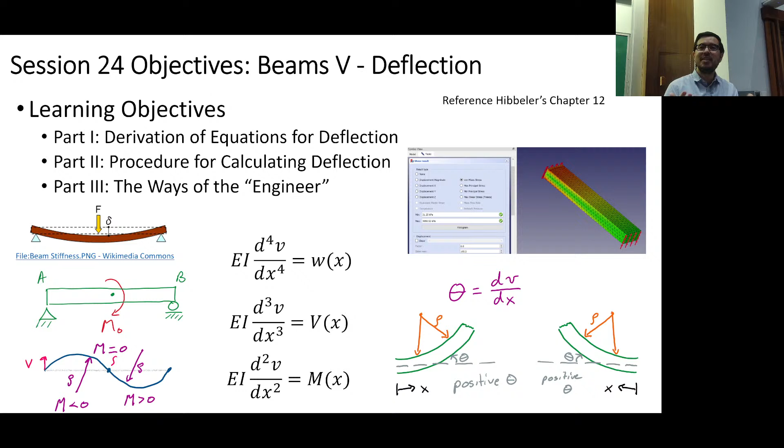So we're going to derive these equations for deflection, and even before we describe the procedure, we'll go ahead and show you how to do it, and then there are some suggestions on the step-by-step technique for doing it. After that, we'll talk about the ways of the engineer, as I like to put it - in other words, the likelihood in 5 years of you doing these calculations, unless you're doing a graduate degree or having a good time on a Saturday night, is low.

What you'll see is that there are tables out there on the internet to help us calculate the deflections across a beam, and there's finite element analysis again - one more opportunity to do finite element analysis. We're not going to use PrePoMax for this example, we'll just use the CalculiX solver in FreeCAD. Yes, I want you to use FreeCAD because that's what everybody has access to, so please go ahead and download it in the EIT cluster now. Okay, so here we go.

This slide is a review of the sign conventions for our diagrams that we draw when we are performing equilibrium calculations using the method of sections on beams. As a recollection, we have this, and I just want to make sure you can see what I can see.

In this case, you've got this distributed force across it, and we would say that if it's going in the y direction, which is typically what we use for the vertical direction, upward, then it's positive. Often this quantity is negative because you have loads coming downward with gravity, either because you're setting a mass on it, or just from the mass and distributed force of the weight of the beam itself. But that is the convention. And we know that this quantity has units of newtons per meter.

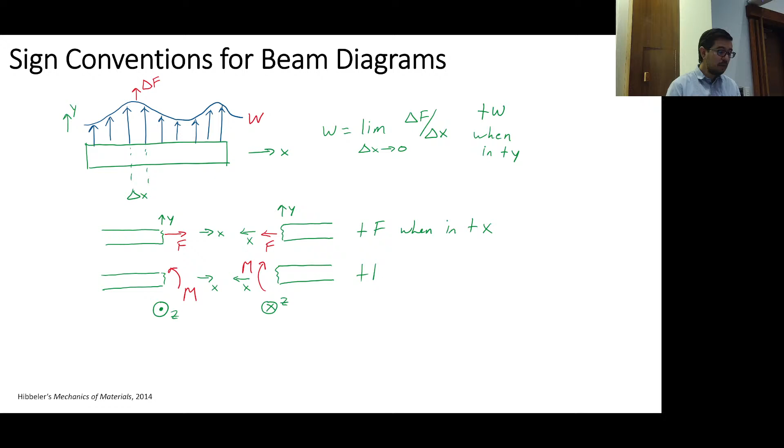The one that always trips me up, I don't know the appropriate way to remember it, but for M I just think about smiley faces. I'm not the most smiley person, but that's the convention I remember. But V, because of my issues with the book I use, which is different from Hibbeler's book, throws me for a loop every time. So V going down if you've covered up the right side, and V going up if you covered the left side. Again, this is just the same thing, with a note that I'm confused because Crandall, Dahl, and Lardner use a different convention. So this is review.

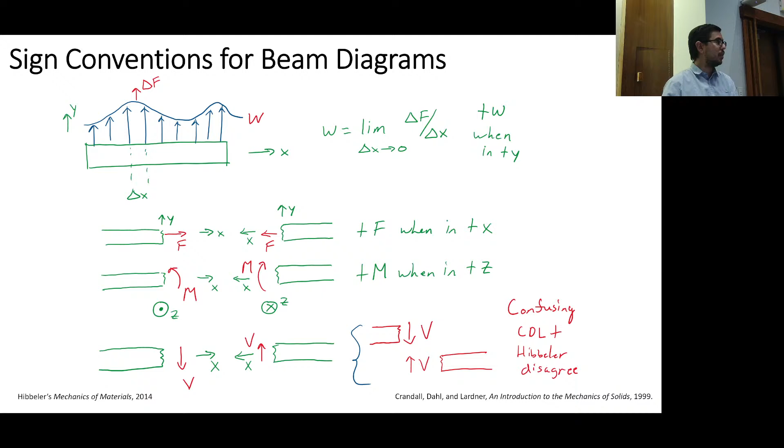Why are we reviewing it? Because we're going to be using this stuff again. This is our fifth session on beams.

So now, do we know? We've said this before - we know with bars how to calculate stress, strain, extension. Shafts, we know how to calculate stress, strain, shear strain, shear stress, and also the angle of rotation, the angular displacement, across it. Trusses, we haven't really talked about displacement too much with trusses, thank goodness.

It's definitely doable. What you have to think about is the extension of each of those members, and then compile it, and you can figure out what the displacement will be at a point on the truss. We haven't really talked about displacement with pressure vessels - not super relevant. We're more concerned about whether or not that pressure vessel is going to be able to handle the loads that it has.

And so now it's time for us to discuss deflection on beams. And we ask ourselves, why do we care about deflection? Well, we might need to meet certain functional requirements. Usually the first one is, will it fail due to yielding?

So I would say usually our priority is first to make sure we've met our requirement for the yield strength of the material, whether that's through maximum shear stress, maximum normal stress, Mohr criterion, or von Mises criterion. But that's the first thing to do. The next level is, I don't necessarily want this much deflection, or I'm designing it so it doesn't sag too much. And another issue that can happen with deflection and bending stress is that you could end up having cracks that propagate and lead to fracture.

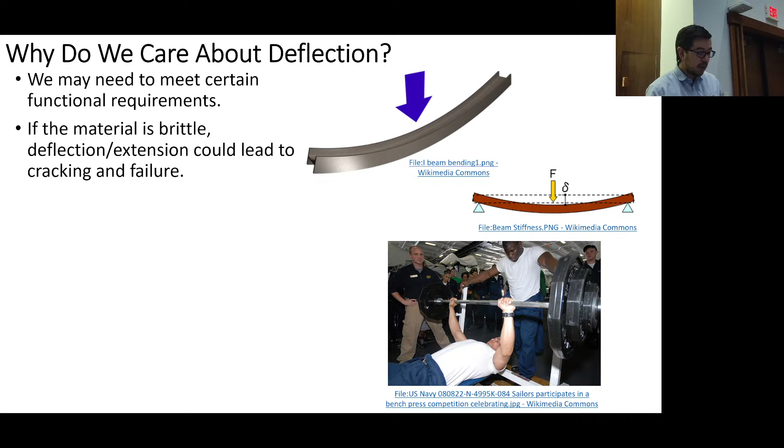Could we go between deflection and stress? In other words, if I have a structure and I'm able to measure its deflection, maybe it would be nice—like if that branch of a tree is sagging quite a bit and I pull on it, I can break it. We have this intuitive idea. We can back calculate, just like using strain gauges to calculate strain and then look at what the stress is in the system. We could do the same with looking at deflections of a beam, and then figure out what the internal stresses might be.

Wouldn't we like to be able to calculate the spring constant? At the beginning of the class we talked about bars as springs, and shafts as springs. We've been able to assign a spring constant, or spring rate, to these different structures to shortcut the calculations—without doing PL over EA every time, just saying the force equals K delta, and K equals EA over L, so I can quickly calculate the extension. So that might be one reason to understand the deflection and spring constant.

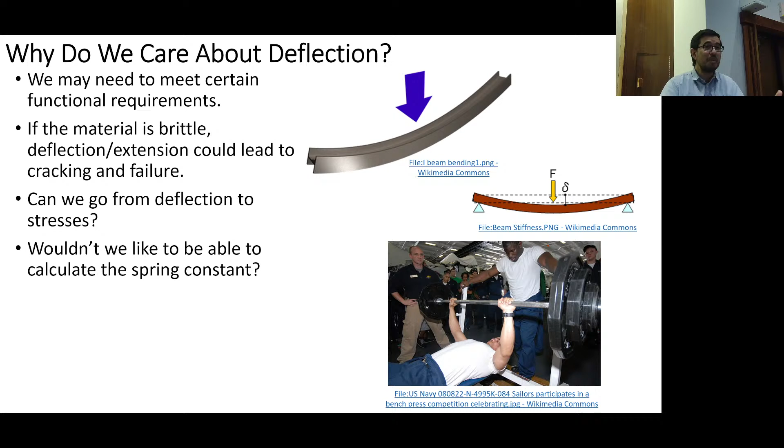And make sure that the input, with the air going over, the vibrating motors, everything else, is not going to excite that resonant mode, so that your wings don't experience too much amplitude of vibration and they stay on. Super simplified example, but nonetheless relevant to beams and their deflection. All right, was that a stretch? Maybe. But a lot of the things in this class have been building on each other.

And then another kind of thing: maybe you get into acoustics and you want to design tuning forks. I hope some of you go off into diverse fields, I hope all of us get a chance to do diverse things. But there, you've got the fundamentals after today. Get it? Fundamental frequency? Anyway. Any musicians? No, okay.

So you've got the idea that if I can figure out the deflection and I can figure out what the spring constant might be, then I could also think about what kind of sound this makes when I vibrate it.

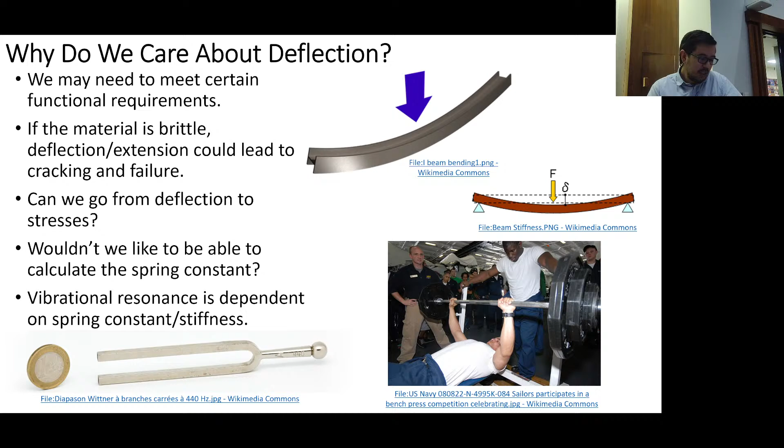And I guess here, this is just a picture. Obviously you don't want these bars to bend, or you don't want it to fail. But you also don't really want it to bend, and you don't want it to plastically deform even more than that. I mean, it's going to bend, right? There's nothing you can do. The thing is going to bend by some amount, but we don't want it to bend, we want to be within some limits.

Okay, this is not the Olympics, but it kind of looks like one of those balance beams, doesn't it? All right, but what is it really? It's a pin on this end, and it's a roller on this end, so we could say that this is simply supported.

Then we want to talk about what's happening on these ends. On the ends, there's going to be no constraint on displacement, no constraint on rotation, and there's no restraining force. The curvature can be zero at the end -- we'll get into curvature in a little bit. But that's what you have at the ends, so that would be here and here.

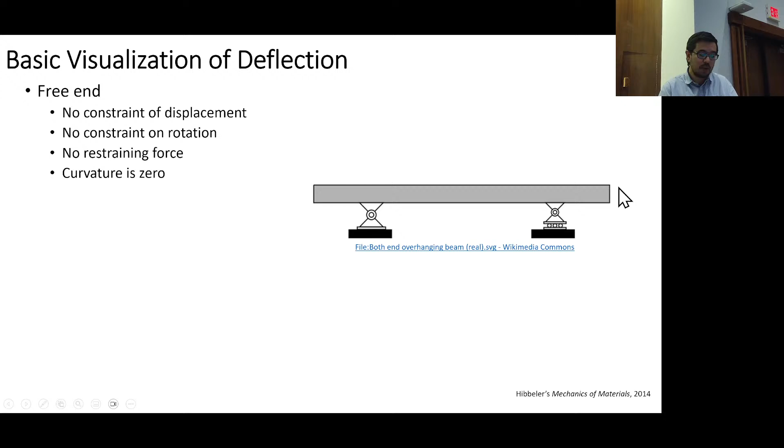If you have pin constraints at the ends, this is now essentially just like this, but we cut the beam, and they don't have any free ends. So here you can say that the displacement is constrained on either end, there's no constraint on rotation, and there's a restraining force. You see that? Those are the boundary conditions.

Why are we talking about boundary conditions then? Well, remember we had to use boundary conditions when we were solving for the internal shear force and the internal bending moments. We're now going to have to use some boundary conditions to solve for the displacement of the beam. If I just put a beam in space and drop it, that's not really a statics problem, but I need to know where it's being constrained in terms of the forces acting on it, where it's constrained in terms of displacements, and where it's also constrained in terms of angular displacements.

We're going to talk about that, and we'll also look at symmetries and internal boundary conditions, internal symmetries that we can leverage as well. A fixed wall will have a constraint on displacement, so there's not a wall -- this is the free end, right?

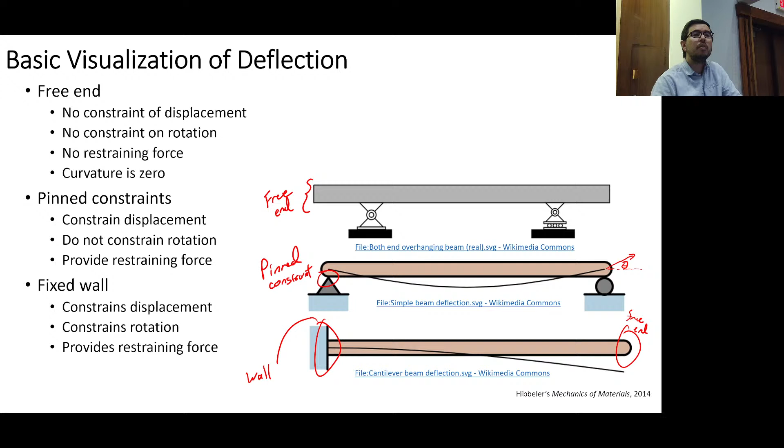What you can see here is, even on this end, there is an angle here, at least with the vertical, with the horizontal. And you see how there's also some displacement. That went down, right? So we usually use v to describe the displacement, and in this case, the v would be negative.

And we use theta to describe this angle. This angle, theta, we describe as being the derivative of the vertical displacement with respect to x. Can you see that? That's no more than saying that's the rise over the run, right? So that's some delta little v, and this is some delta x.

So that's how we're going to describe slope, in terms of theta and in terms of dv/dx. This is going to be kind of like our curvature. I don't expect you to remember all this, but when we discussed our derivations for the flexure formula for beams, we said that if the center of a circle that is carving out the curvature, or the radius of curvature...

When rho would be the radius of curvature, if it's above the beam, we said the curvature was positive. And if the center of that circle was below the beam, we said it would be negative. But here we can almost see that there's going to be some curvature in here. And this curvature, which would be kind of like this 1 over rho, that is going to be, so we'll call that curvature.

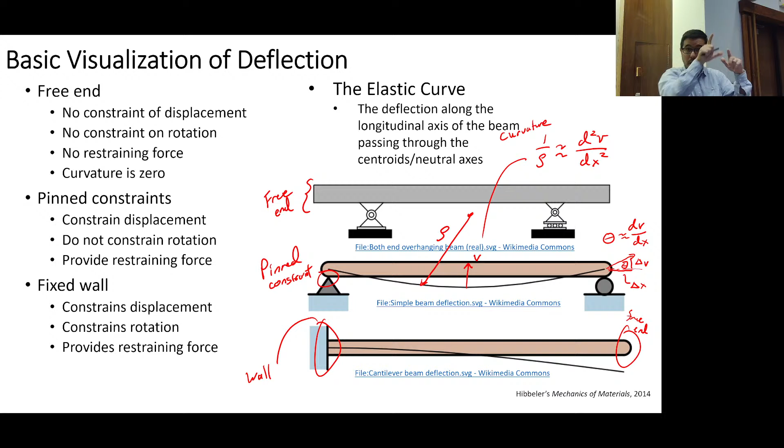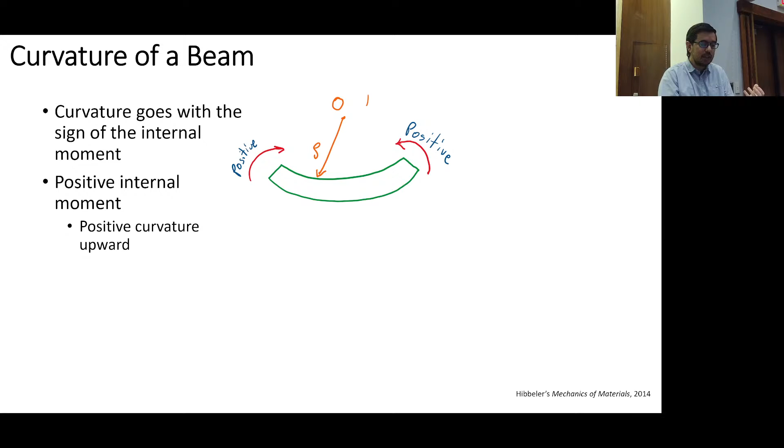Anyway, so we can say something interesting. This is the smiley face we talked about, and that smiley face is associated with a positive moment. So when the center O is above the beam, we have m greater than 0. So now we're starting to correlate the deformation, the geometry, and the internal bending moment.

And whenever you start making relationships between forces or stresses and moments with deformation, that goes back to our third pillar of constitutive relationships, constitutive equations. So we're going to work toward figuring out how to couple the material properties with the internal loads and external loads, to be able to figure out how things are deformed.

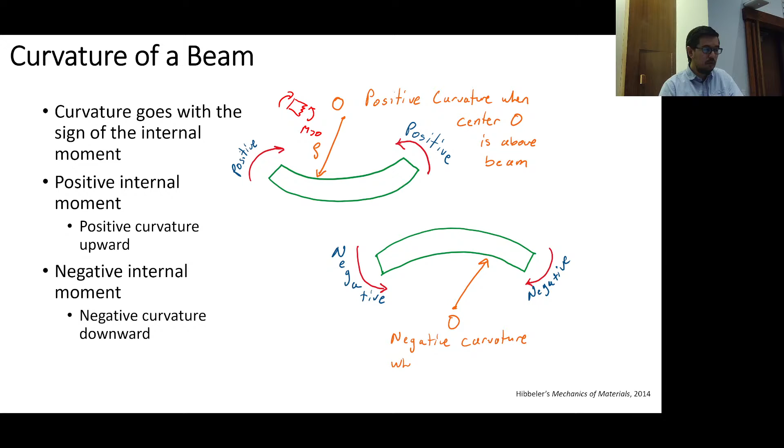So once again, if O is above, that's positive. If it's below, it's negative, and that's what you see here. In this case, the O is below, and we're good. Now let's just think qualitatively about what's happening with the curvature of a beam. Qualitatively meaning at least I want to know is M positive or negative in particular areas.

And also think a little bit about the shear force. Okay, so this would be the shear force diagram across this beam using the conventions that we've had in the class.

So remember, what is this magnitude of the jump? If I want to know, going from this point to this point, what is that magnitude? Yes, P. It's P, right?

And we're going, P is coming down, right? And as we're going left to right, and this is going to become even more important today, we have to know if we're going left to right or right to left. So that's that drop there, and then this is what the internal bending moment diagram would look like.

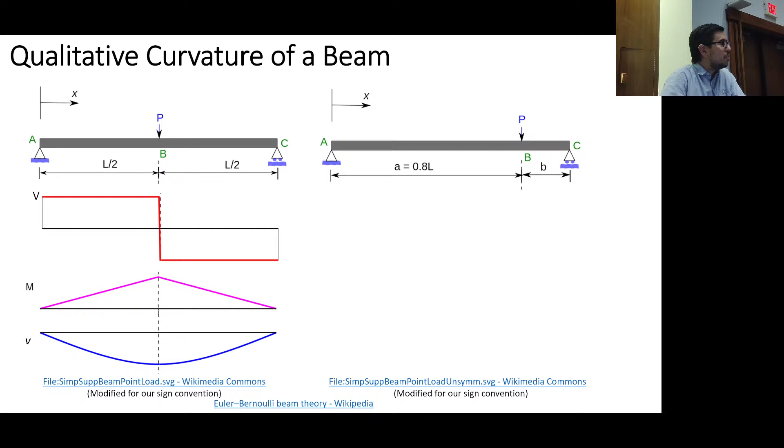The displacement, we can intuitively say, if anyone ever stepped on anything supported with some type of flooring and beams on either side, this is what you would expect. Or if you step on a 2x4 supported on either end by a block, you're going to expect this type of deformation.

And what's cool is this is intuitive, but in the class we've kind of been developing this intuition as well, right? What's happening with the forces and the moments inside. So once again, yes, we have positive curvature.

And this problem is very similar, right? In that we have a shear force internally as we're going across, and the bending moment is also very similar, but it peaks at this location of P, and we have also a positive curvature.

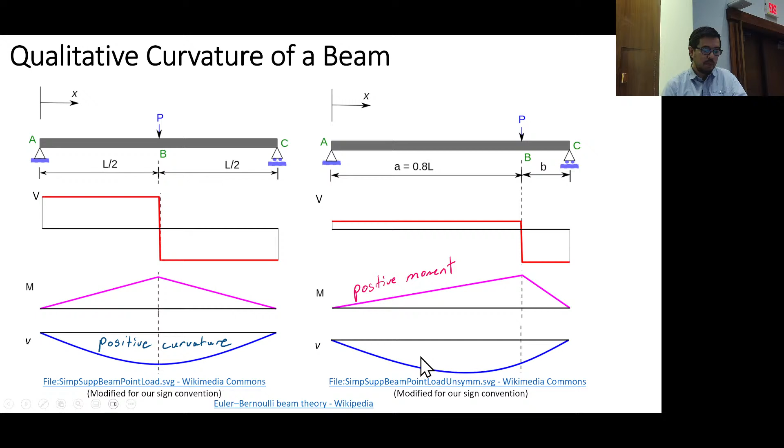Any questions on what we're doing here qualitatively? No numbers, just thinking about how does the deformation go, or how does the elastic curve go, with what we've kind of been describing previously.

So what we would like is a relationship between the radius of curvature and the bending moment. And we've kind of done this already, okay?

The shear force, I've said this also before, does contribute some to the deflection, but typically it's not a big deal. Remember, we've done this example with the pure shear and the double shear, where we asked how short do you have to make the beam such that the shear stress gets close to, or half of, the bending stress? In fact, I said specifically half of the bending stress.

And why did I say half of the bending stress? Well, now we know. If we're caring about the maximum shear stress theory for failure, we need to understand that a bending stress, or a normal stress, is going to be twice the shear stress that we get under uniaxial loading.

This is more Mohr's circle, uniaxial loading. What's the equivalent shear stress? A 45-degree material element, and the shear stress is just the radius of that Mohr's circle, and that was sigma 1 divided by 2. Okay, we've done this a number of times now.

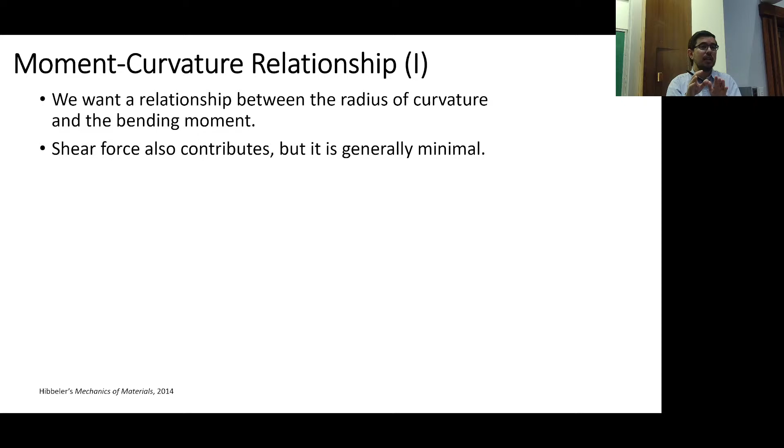So we don't care too much about the shear force, but we do care about the bending moment, and we are going to describe a distance along the longitudinal axis, and we're going to describe the bending moment as M, and we'll say there's a V, which is a positive upward displacement, okay.

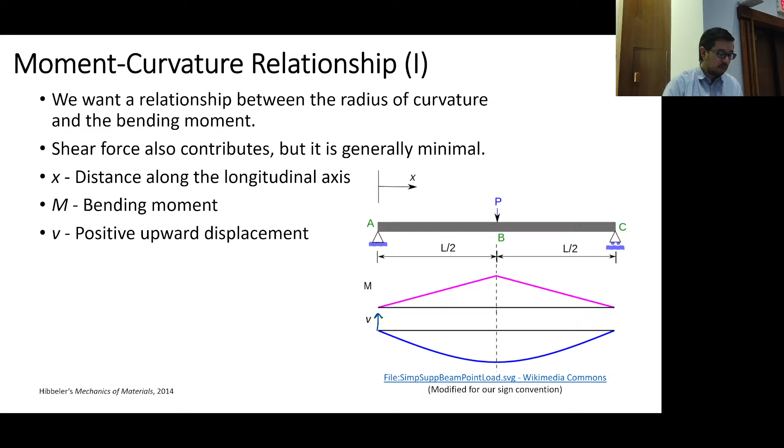And we'll go from there. So this is kind of familiar in terms of this radius of curvature. We talked about the strain and the radius before, okay?

When we did the derivations, but we kind of tossed it out. We said you don't really need to think too much about that minus y over rho stuff. Well, it's coming back.

And the deformed element will look something like the keystone of an arch base bridge, an arch, but upside down, here. So now we say this element has undergone some deformation. If A and B are closer to each other, D and E are farther apart, and the angle we've carved out is delta theta. We're going to have a rho that goes to the longitudinal axis, and some distance above the longitudinal axis that we'll call y, and that's going to affect the local curvature and local radius at any of those locations. And of course the longitudinal axis is going to be unchanged, not deformed.

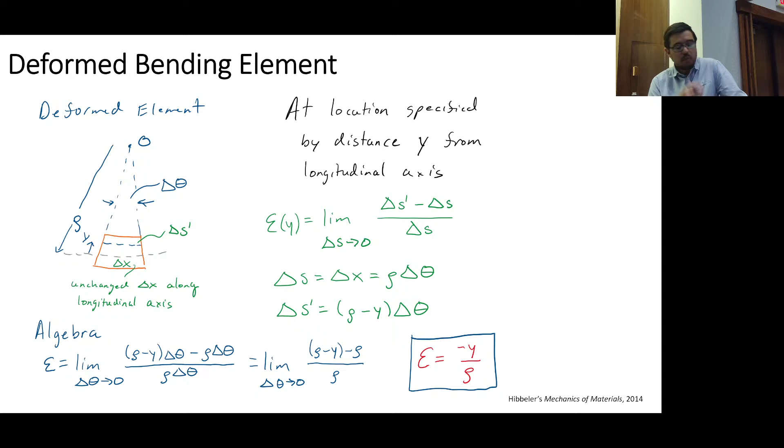So what do we do with this? We have this deformation epsilon - and this is not deformation, this is strain. And what we're saying is that this is the change in, say, a length above the neutral or longitudinal axis divided by its original length.

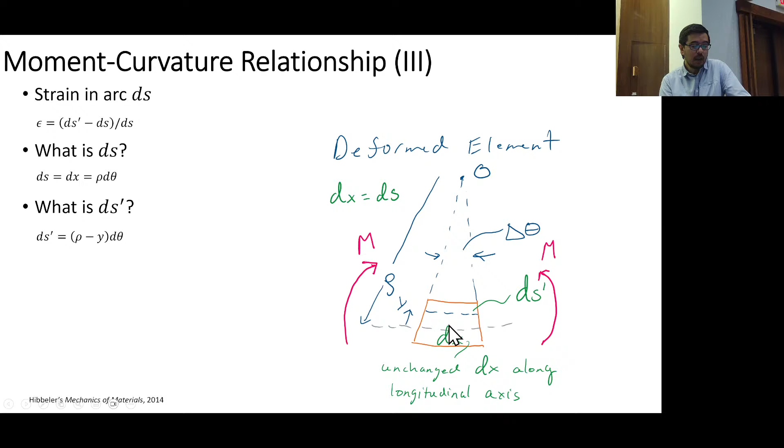And what is ds? Well ds we can say is going to be equal to dx, and dx is the original length of the element we've selected, the arc length of the longitudinal axis over the width of that element. So we can say that is rho times d theta, whatever angle we've carved out at that point. And what is ds prime? Well ds prime is this rho minus the little distance above the neutral or longitudinal axis, times that arc that is cut out - that would be the arc length here. That's what ds prime is. Any questions on this? No?

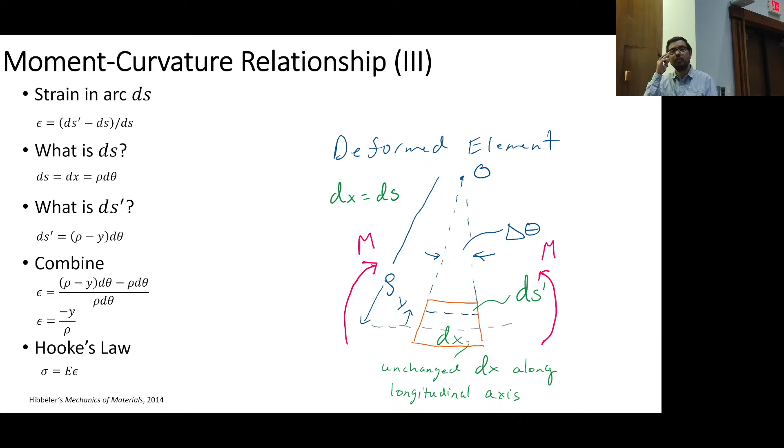Okay so now we've combined these things and we got epsilon is equal to minus y over rho. That's fine. Hooke's law - it's been a while, right? For loading in one direction. So we have sigma equals E epsilon, elastic modulus. There's an important constitutive relationship, that's Hooke's law.

The flexure formula: sigma equals negative my over I. Right, you see where this is going? There's a sigma, and there's a moment that we know is positive. We can combine them and we get this: 1 over rho equals M over EI. Curvature is 1 over rho, flexural rigidity is sometimes what we call EI. So you see this equation.

If I increase M, then 1 over rho increases - make sense? And you already saw that: M positive and more positive, then curvature goes up. 1 over rho is the curvature. Or rho goes down - the radius gets smaller.

This EI is called flexural rigidity. If I increase the thickness of the beam, and it's rectangular, that means I've increased my H, right? And that was the I for rectangular cross section - remember that was BH cubed over 12. That's the integral of y squared dA.

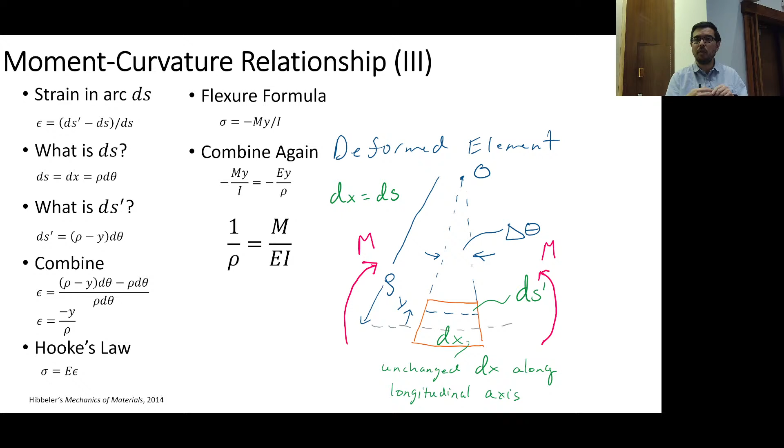And kind of foreshadowing, let's just go back big time. You're like, what is he doing? Well, I'm being annoying.

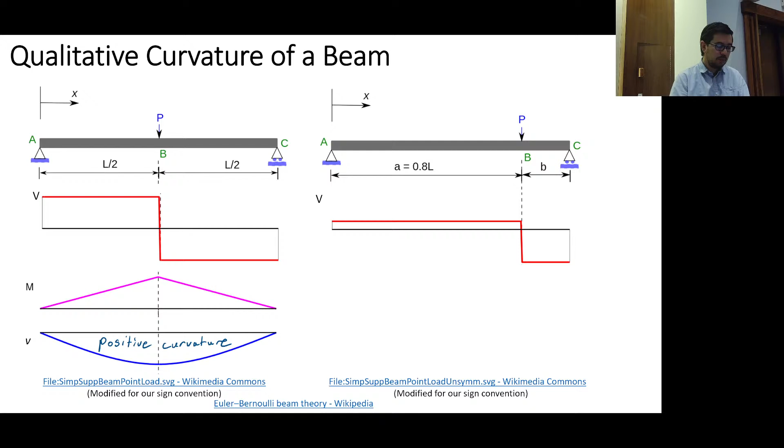Remember this? Even back here we scribbled in, hey wait a second, 1 over rho is somehow proportional to the second derivative of displacement with respect to x. And then we have this dv dx term, and we have v.

Well, if now I've got a relationship that says m over ei is equal to this term right here, and my goal is to get the displacement, what do I do? I've got this now, it's m over ei. This, let's say, is equal to m over ei. How do I go from this? If I've got the left side here, how do I figure out what v is?

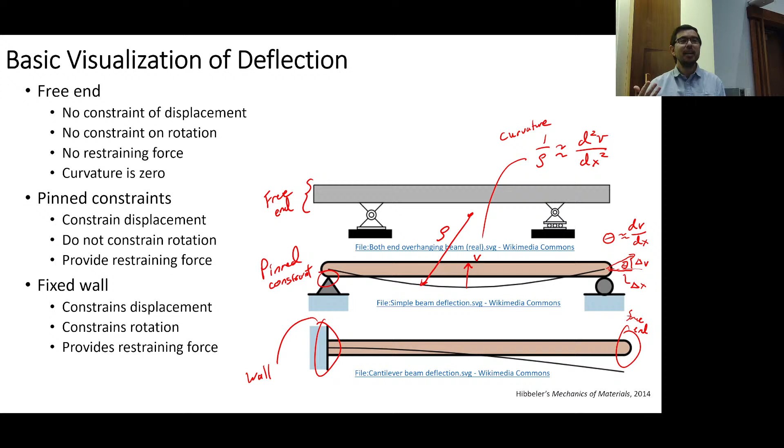I heard it, who's mumbling that? You said integrate twice, right? That's what you do, okay?

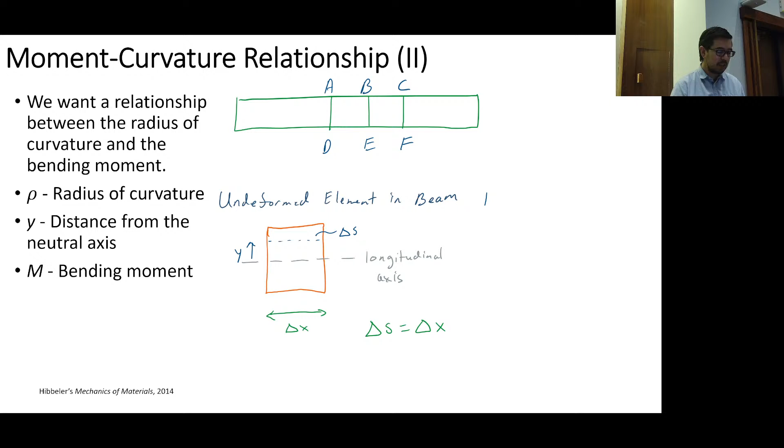All right, so that's what we're going to do. That was worth looking through, flashing back through all these, through, I don't know, what is it, 20 minutes. Okay, so we are going to do that. We have a relationship between curvature and stress.

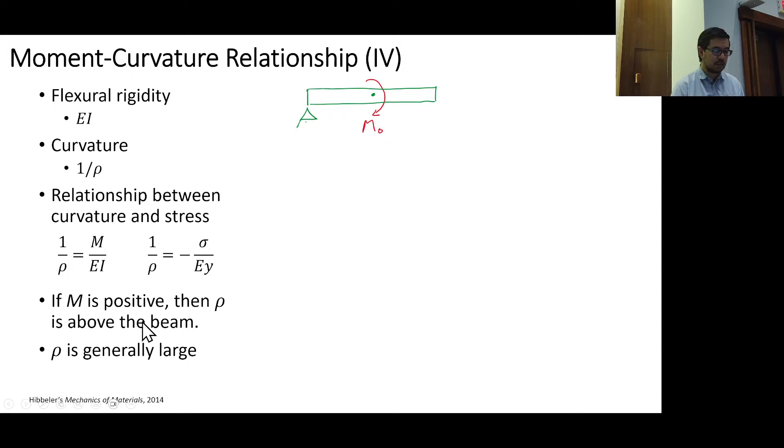Great, okay, if m is positive, then rho is above. Rho is generally large, yes, yes, yes, these things are true. And we can use them to think about how things deflect. Okay, that's great, come on, I just want to get to the deflection. Here we go.

In your calculus class, you probably had this relationship. We're going to greatly simplify this. Okay, but this is the definition of curvature.

We're going to say that now our 1 over rho is equal to m over ei. We can put that in on the left side. And we've got a small dv dx, usually. You see where this is going? Well, if I have a small thing, and it's down here, and then I square it, it becomes even smaller. That's nice and convenient.

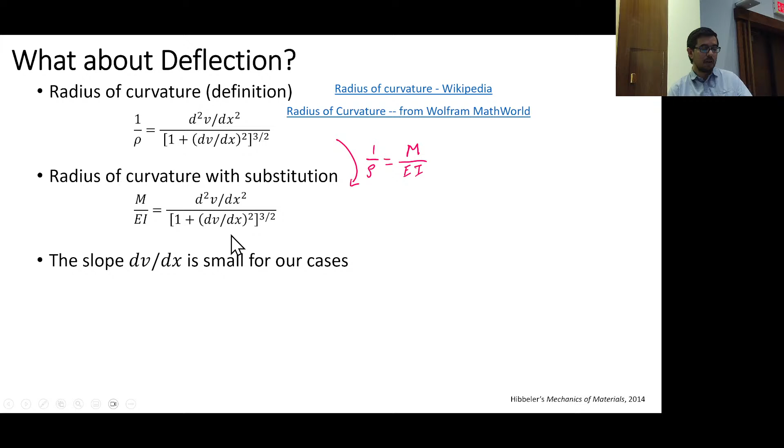Because if I say this is now very, very small, then that means I just have 1 plus a very, very small thing, and that becomes kind of 1 in the denominator, and so I get exactly what we just wrote on the slide 20 minutes ago. That the 1 over rho was going to be somehow related to the second derivative of the displacement with respect to x.

So I can rearrange and I can say m is equal to ei times the second derivative of v with respect to x. Now, does this look like something that we know how to solve for? Yes, we absolutely know how to solve for m at this point in this class. Okay, we better, this is the internal moment.

But do you remember that there were those other equations? There was that w equals dv dx, okay, and that dm dx is equal to v. Do you remember these equations too? And remember how we said, hey, sometimes you want to think about just starting from a distributed force across the beam, right? And then once we've done that, we can figure out what the v is, and then we can integrate the v to figure out what the m is.

And now we're saying that if we know what the m is, we can integrate it once to get the slope of the deformation, and if we integrate it again, we can get the deformation, v. How many integrals is that? If I want to go all the way from a distributed force now to v, how many integrals do I get to use?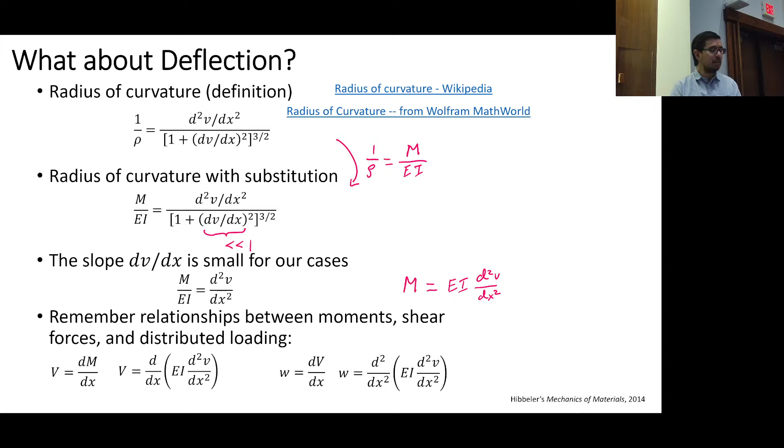And if e and I are constant, which they often are for our problems, constant cross section, constant material, and material elastic modulus, then we can write these. And these you definitely want to have on your sheet of notes. They're not that earth-shattering, okay?

And there are some steps that may be wise to bypass. For example, if you're given a problem where you already know m, and you're asked to figure out the elastic curve, which means you want a relationship, you want to come up with an expression for the lowercase v, don't do four integrals, right? You only need to do 2 integrals. Because you just have to integrate m twice, and multiply by 1 over ei to get v, lowercase v.

If you have to start all the way back with a distributed force, then yeah, you could do these integrals. Often though, we know how to figure out m. We're pretty good at figuring that out, at least for determinate systems. On Tuesday we'll talk about indeterminate systems, but for determinate systems, even though we have these fun-looking equations that let us do 4 integrals, often it's a good idea to do 2 integrals to figure out m, and once you figure out m, then do 2 more integrals to figure out v.

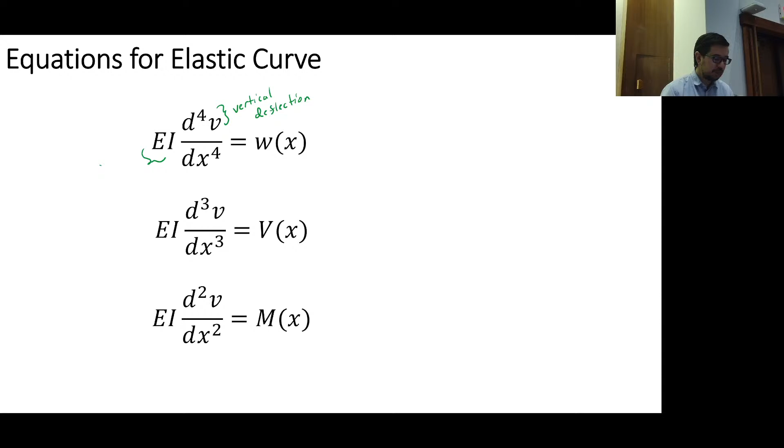Okay, so we've got all that description. All right, so here we're not even going to draw - look, there's no drawing in here. This is just a chance to do the math, there's not a diagram. Now you can think of what the diagram should look like though. Just look at the problem for a second and tell me what you think this beam is experiencing and what are its constraints.

So there's the math, and we're going to figure out deformation without doing any free body diagrams yet, nothing like that. But what is this external loading describing? What are the boundary conditions describing? And how would you draw this beam from the math?

Yes? Distributed load. Okay, so distributed load, right, because it's minus W naught, so remember distributed load across the beam, and it's across the entire beam, because w(x) is equal to minus w naught. Good. Now, okay, so that tells me something.

What about the beam? What are the constraints? How's this beam externally being supported? Yes, can you put your fingers up like that again in the green shirt? Yeah, all right, that's it. It's got essentially a pin on one side and a roller, we could say, but really it's like a pin-pin configuration. So that is a simply supported beam, and we can go ahead and start messing around with this.

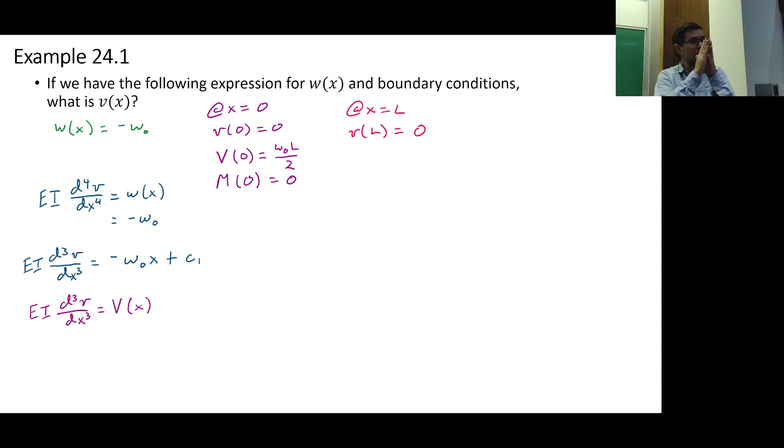Okay, and if we had done the free body diagram and the external loading, and then took a little bit of slice, remember how we did these things where even when we use the integral differential relationships, we would have to do external loading first, and then go just a little bit to the right of the left side, and a little bit to the left of the right side to figure out what the internal shear force was. But that's already been given to us, and that's what that value is.

So we can say, all right, that's the boundary condition, and then we can pop it in. So C1 is just going to be that.

What's next? Well, now we have this integral, and we've introduced another constant, C2. We took the integral of this expression right here. We already know what C1 is, but it's just kind of dangling here. And we've now got EI second derivative of v with respect to x.

And what do we know? We know that this expression, EI second derivative of v with respect to x, is equal to the moment, m. And once again, we can plug in our boundary condition. We know that m at x equals 0 is equal to 0. So what does that mean C2 will be? 0, right? It has to be. So we plug that in, and we get that C2 is just equal to 0.

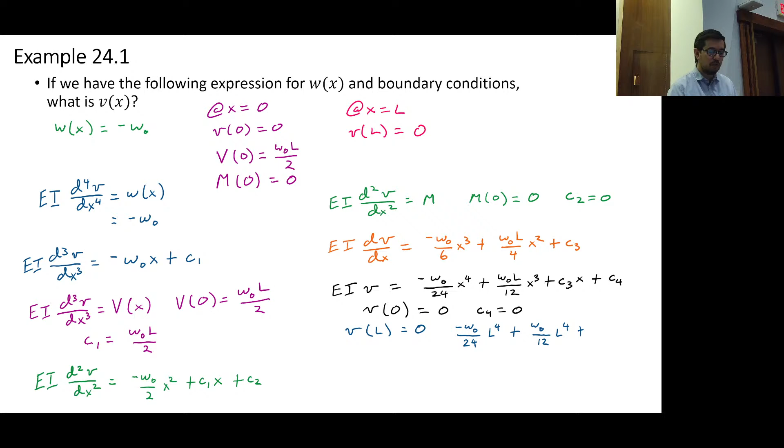All right, this one's a little more complicated. I had to plug in v of L, and I got to get 0 there, right? So I had to plug in L here, L there. And when I do that, we can solve for C3. So C3 is this quantity there.

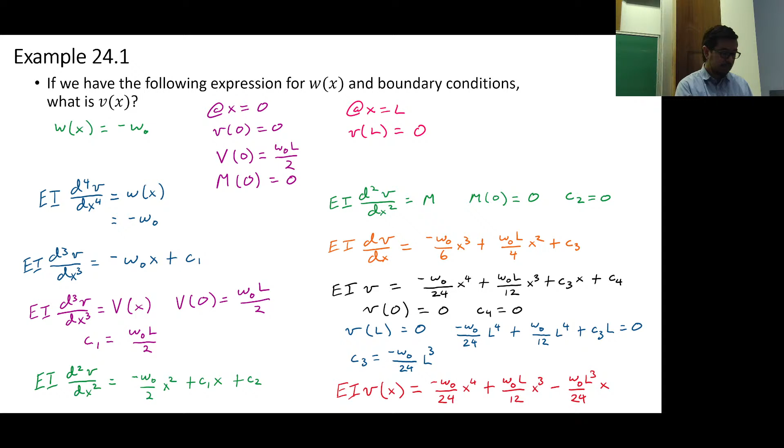And the result is an elastic curve described by this equation. And often what you'll see is we put 1 over EI in front of it. Okay, so we can say it looks like something like that. And we have this type of system, okay?

And we've now got our expression, okay? And we could even figure out where the v is a minimum, and we can do that where x is equal to L over 2, and we can figure out that value.

Any questions? This one, any questions on this? Any thoughts, concerns? Okay. Some of them are moving kind of quickly, but you have a chance to run through this a little bit in more detail.

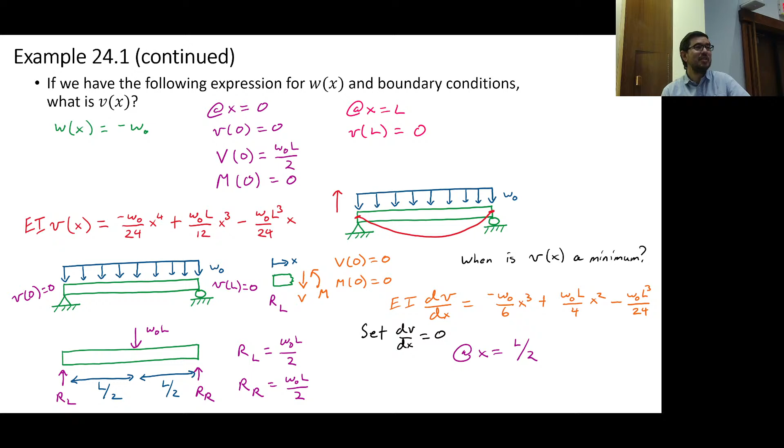So if you like integrating polynomials and plugging in boundary conditions, this is the time. This is the moment. The moment, not the shear force. Well, it could be the shear force too. All right, so you have a question there that you get to work on.

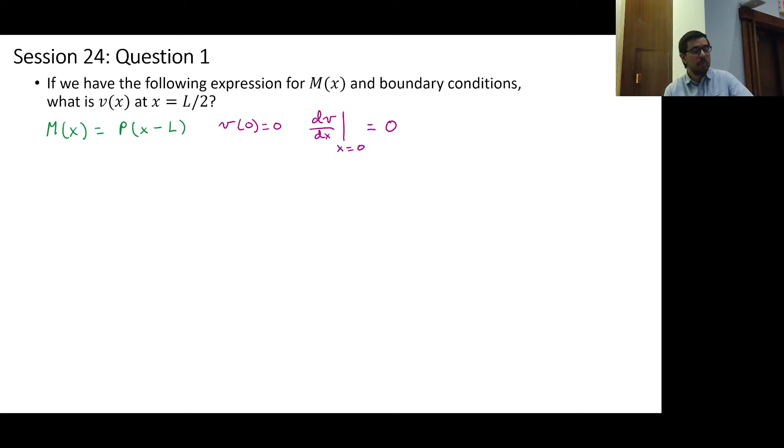In this case, you're going to have the m of x given. So that's kind of nice, right? Because now you only have to do 2 integrals to get to the little v.

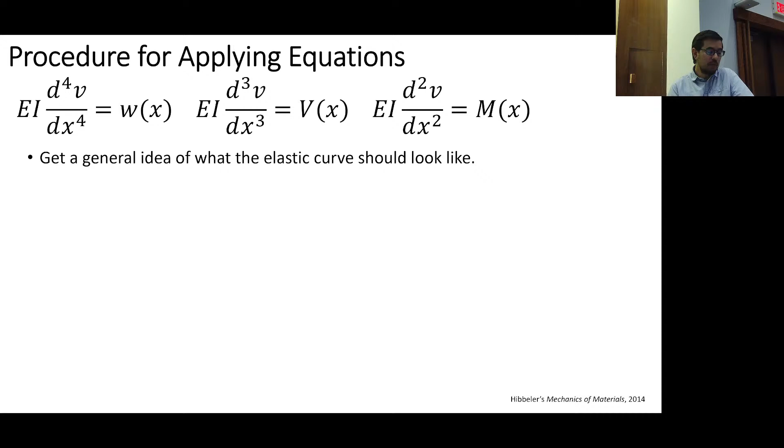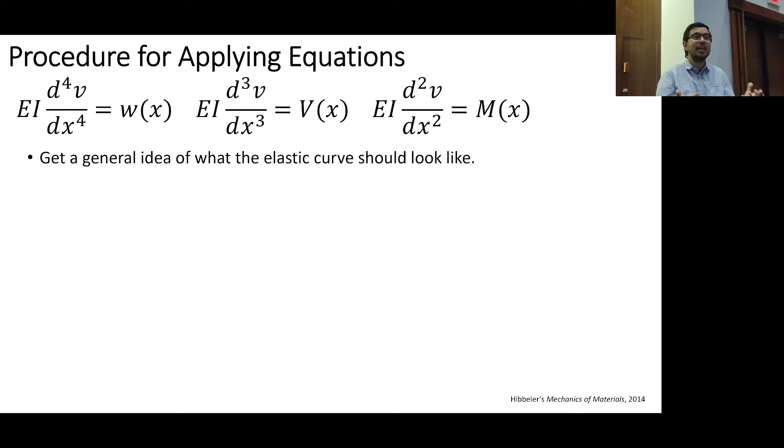We're going to talk about a procedure for solving for the lowercase v using these equations. First, think about it, okay? Try to get a general idea about what the deformation looks like. I don't know if people are going to take pencils to this next exam and start putting their fingers and doing distributed loads across it and then say, oh, hey, look, that's what it looks like, right? But that's the idea. So you want to get an idea of what the elastic curve will look like.

This step can be confusing, and we haven't discussed it yet. We will now, though.

Just like we would introduce these delta V's and delta M's when you had a concentrated force applied, or a couple moment applied to the beam as you're going across, we'd say, ooh, I can do everything up to that point, and then I've got to change it up. And then you go on. Or sometimes you go from the other side, so you could do things, but at that point where there's another load being added externally, or another boundary condition, you could even have an overhang—that was scary. It's still a little bit scary here.

So we're going to talk about how we break up the beam. It's like a relationship. You got this nice little beam, you got two towers on either side, they like each other with the beam in between, and then something comes in between them, and now you got a discontinuity, okay? It's like having kids. That's what happens.

Now we've got to find the necessary expressions for moment, shear, and/or distributed loading. We're going to integrate twice for moments, three times for shear, or four times for distributed loading, and we have to keep adding constants. So you already saw this, right? These are indefinite integrals. We have to keep putting constants in and keep solving for them.

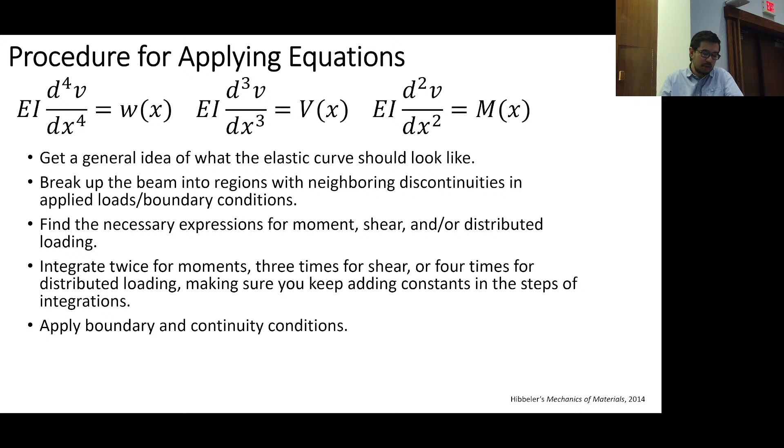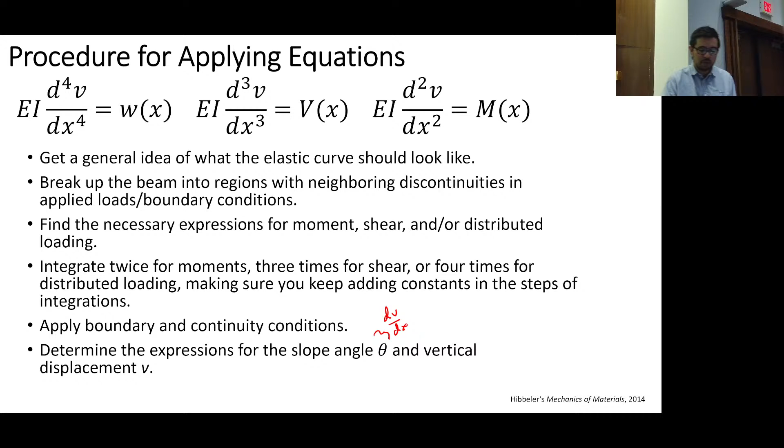To solve for those constants, we're going to apply appropriate boundary and continuity conditions. We'll get into continuity, what that means, because right now we're just looking at boundary conditions. But there are also some interesting things that happen when you are coming from far apart and you meet—that's a continuity condition. Then we'll determine the expressions for the slope angle theta, which is dv/dx, and the vertical displacement little v.

So now let's talk about breaking beams. This is hard. Breakups are hard, right? In life as well.

Here, if you just have the P at the end, everything's pretty happy, nothing too serious. But once you add this extra P, that adds nervousness to me, or maybe a little bit of anxiety. In fact, on the last exam, initially I wrote it just with a nice distributed load across it, and then I said, well, what if we just make it so the distributed load goes halfway across the beam? I started working it out—I was like, you all could do this, but in the limited time that you have, probably a bad idea. So it's just better to keep it with a distributed load across the top.

And we see now we have this jump in the P, in the negative P, like that, and you can see that this is what you would get. This is flat, so these are actually supposed to be lines with slope—they're not curves, they're lines with a point. All right, that's as bad as my drawing might be.

Here are some options. One option: I'm going to describe two parameters, x1 and x2, and they both are with respect to the wall. Another option: I want to describe what's happening in between the wall and the first P, and what's happening between the two P's, so I'll describe what's happening with x1 up to the first P, and then define another parameter, x2, from the first P, moving to the right. A third option would be: I'm going to describe an x1 coming from the left and an x2 coming from the right.

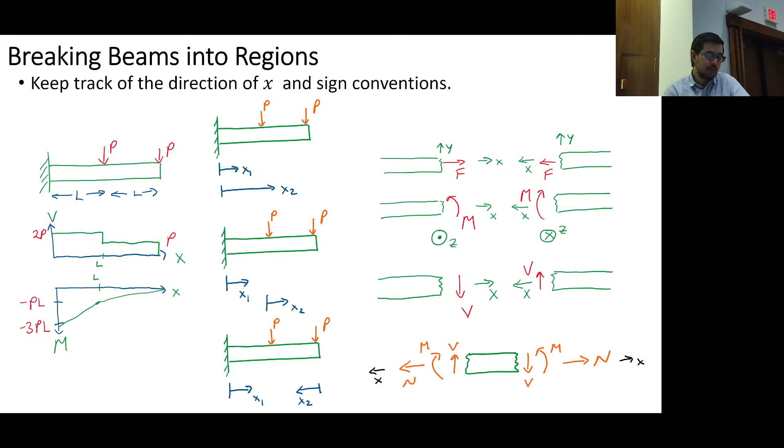Now, when we break the beam into regions, we've got to keep track of the sign conventions. That's a given. We also need to keep track of slopes, and you can begin to see this behavior.

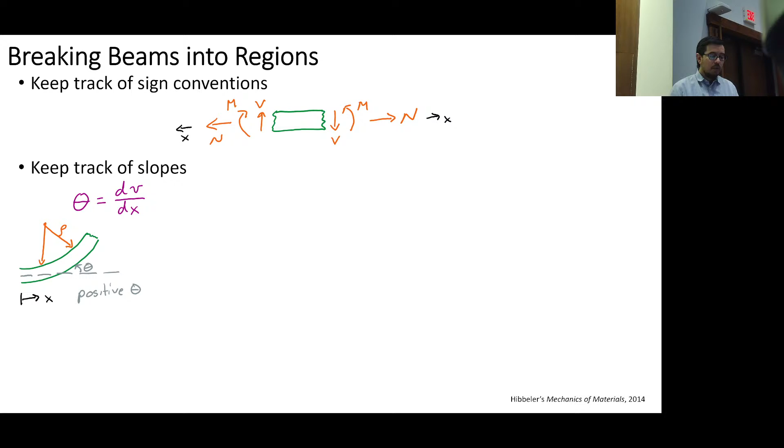This has a positive curvature as well, yes it does. But if I'm coming this direction from the left, that's positive theta. If I'm coming from the right and I go up like this, that's also positive theta.

Can you see that? They would actually have the opposite slope. If I'm coming from the left and going down like this, the slope is negative with respect to x on this side. And if I'm coming from the right with this little x and coming down, the slope would be negative for that parameter on the right.

Can everyone see that? It's the same idea I just discussed when you hit a jump. If you're coming from the right and the P was down, then you go up. If you're coming from the left and you go down, then you go down. So the slope can be a little bit tricky.

So here, displacement—I'm now writing this in terms of x1 and x2. So v1 would be associated with x1, and theta 1 would be associated with x1, whereas v2 would be associated with x2, and theta 2 would be associated with that x2.

Here, they're going the same direction, going with the flow, and we can say that at this distance d, this is where we talk about continuity. Before we were talking about boundary conditions, which are typically on the ends, though you can have them in the middle too. But now we're talking about continuity between our different coordinate systems.

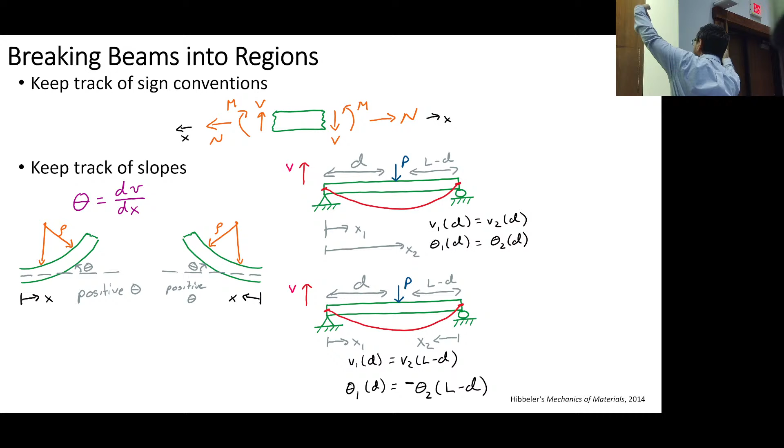But this is a little bit hard to grasp: if I start going up this, let's say that D is here at that location, then I'm coming down here to this location—I think I said it not so well before. Let's say the curve is like this, and now I meet over here. You see that as I'm going to the left I'm going up, and as I'm coming from the right I'm going up, and as I'm coming from the left I'm going down. Those slopes have an opposite sign relative to each other. I hope that was more clarifying.

Okay, so if the coordinate systems come from opposite directions, you have to introduce this negative sign to get continuity. Why is this important? Because, look, I can integrate and have indefinite integrals with constants that I don't know, let's say, for V1 and V2, right? And where there's some kind of interference being introduced, okay?

Some force, something, some boundary condition, whatever it might be. And I can come to that location, and then I can try to figure out what's happening with my displacements, and what's happening with my slopes. Okay, and that allows you to then solve again for these constants in these indefinite integrals. So that's why we want to use this - the previous slide I said you can apply boundary conditions and conditions of continuity as we move across. Any questions on this?

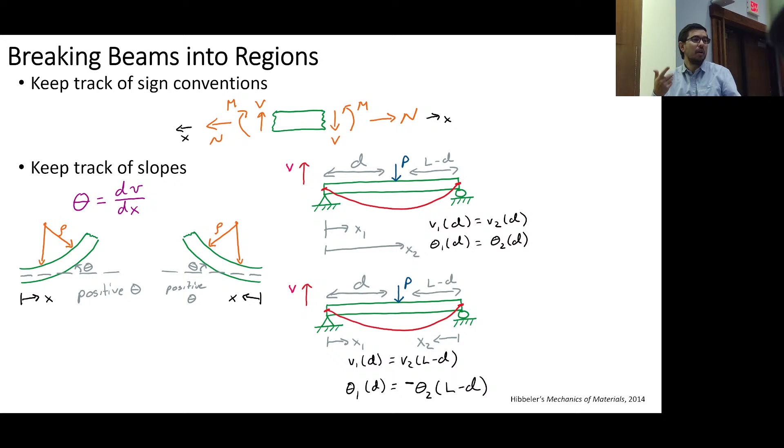Okay, so the V's, the little v's, the displacements - up is positive, down is negative. Doesn't really matter if I'm coming from left or right. The slopes, those do matter, and I need to match them up and put a negative sign, add an inverse sign.

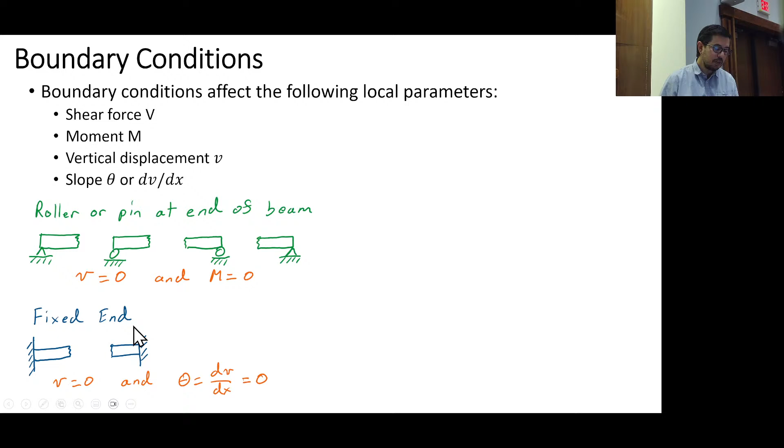So the boundary conditions affect local parameters, of course they do. Shear force, bending moment, vertical displacement, and slope. And you have rollers or pins - we know that the displacement is equal to 0, M is equal to 0. A fixed end, we have v equals 0, and theta, dv/dx, is equal to 0. And the free end - kind of what we said at the very beginning with better diagrams, not mine, not my drawing - we have a shear force of 0 and M equals 0.

Okay, so let's just talk about this for a second. Maybe these are pretty simple in terms of, okay, the displacement has to be 0 on top of a roller or a pin. And at this point, you're happy whenever you see a roller or pin because you know the moment there is equal to 0. The force, you know, is an external force acting on the system you don't know. This one is maybe a little bit new.

Not that one, this one. A cantilever beam at the wall, it comes straight out of the wall. Now, it can change right after it's left the wall, right? But that slope coming out of the wall is 0. So now, if you see a cantilever beam and you're doing these types of problems, you might be a little excited because you're like, ooh, I got one more boundary condition. I now know that the slope is equal to 0.

Free end is often exciting too because the shear force and the bending moment are equal to 0. And you already knew that, but this is just a reminder of that. But the displacement doesn't have to be equal to 0, okay? The curvature is equal to 0, but it could be going at a slope. So dv/dx is not necessarily equal to 0 on a free end. Curvature, the second derivative with respect to x.

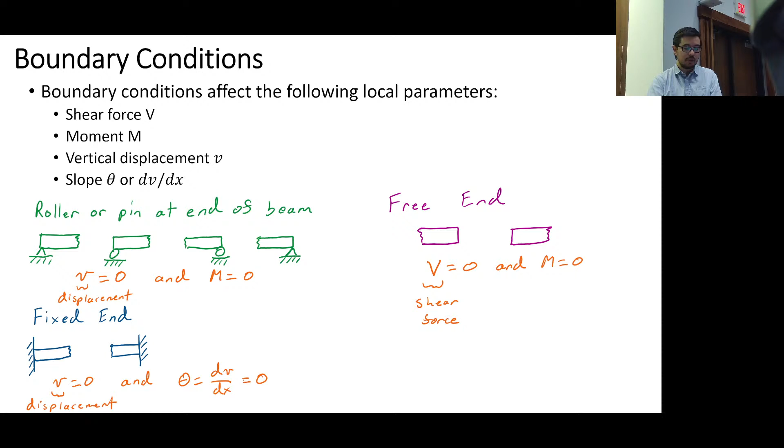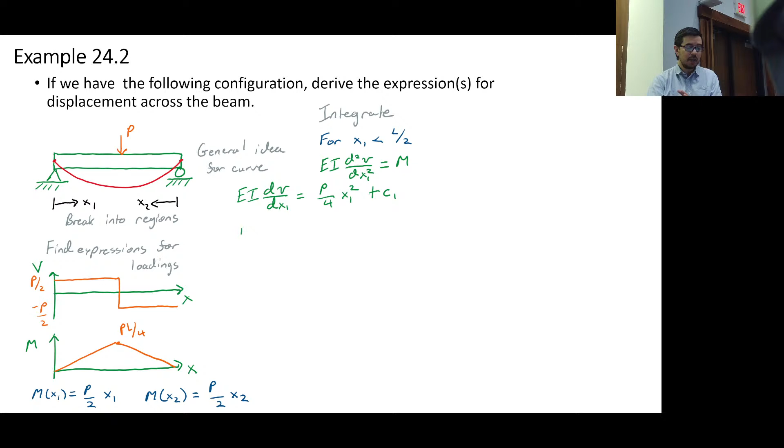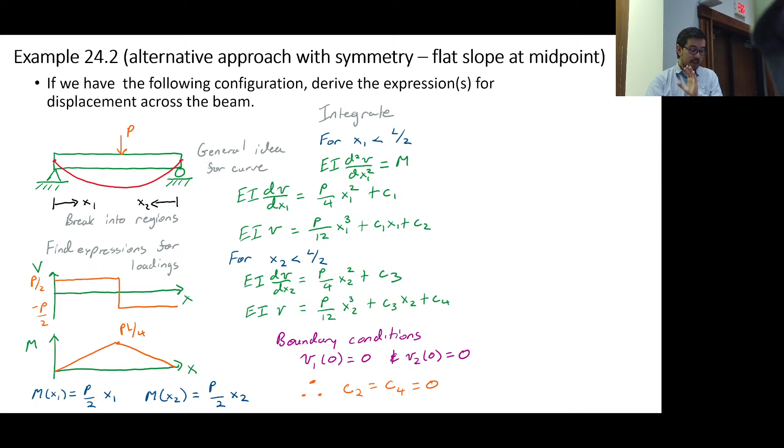So here's an expression or an opportunity, and you can go through this. I think it's okay, I'll try to also do some videos and stuff so it can explain how to do these prior problems. We're running out of time. This is not trivial stuff, it really isn't, so you want to take some time. And the problem at hand for this is also not trivial. It's actually a little bit - the first time I did it, I tried to take a shortcut.

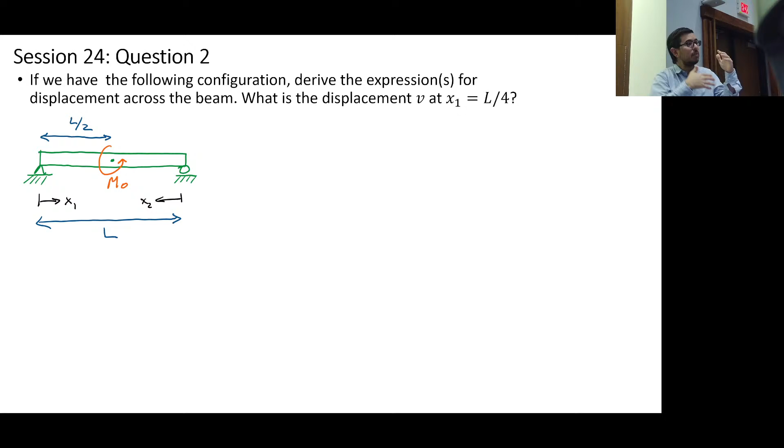My shortcut was I tried to assume that the slope was 0 at L over 2. Okay, it turns out the slope is not 0 at L over 2. So it made me solve the problem faster, but it made me solve it incorrectly. What do we have to do? We have to use that continuity of the angle when we come from either side to be able to figure out what's going on at that location.